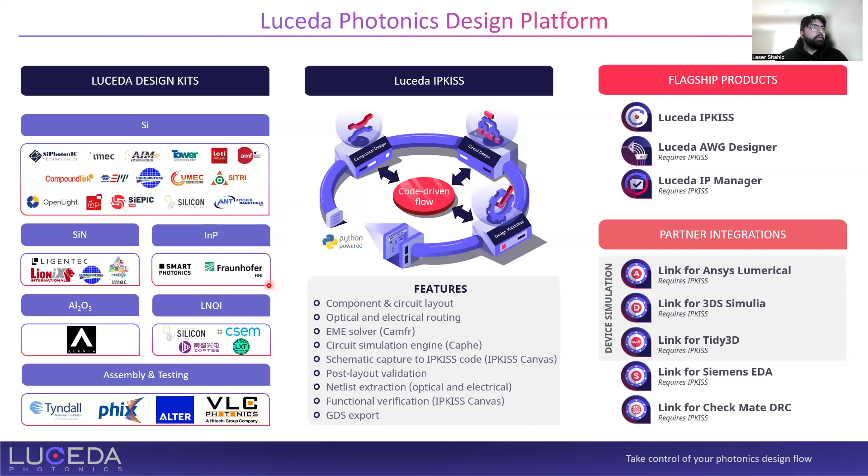So Luceda IPKISS has many different features and helps you to facilitate different stages of the design process. So the first thing we'll talk about is component design. Again, we're using a standard language, Python, and the way that we're able to do component design with Python code is that it's parametric. So the components and the layout and the simulation are all able to be parametric.

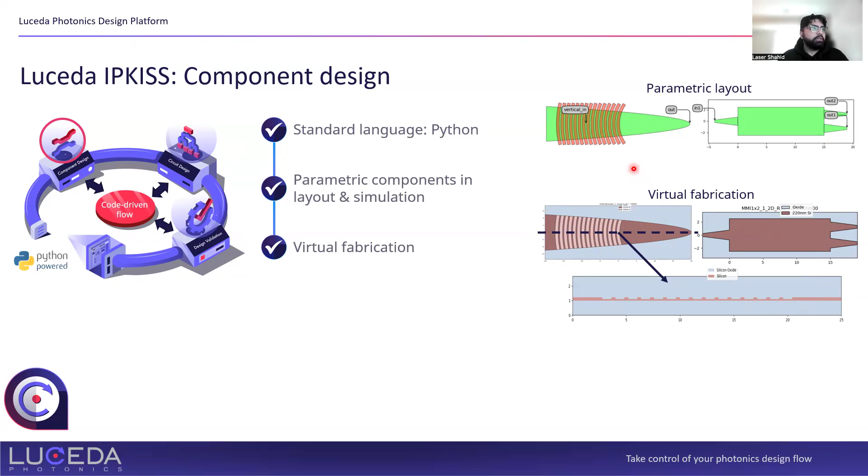There's a virtual fabrication feature where you're able to see what the device would look like when it's fabricated using the PDK. There's a built-in physical EME simulator, so you're able to run EME simulations with IPKISS, and then of course, as I mentioned earlier, you're able to do simulations with third-party tools such as Lumerical, Tidy3D, so on and so forth.

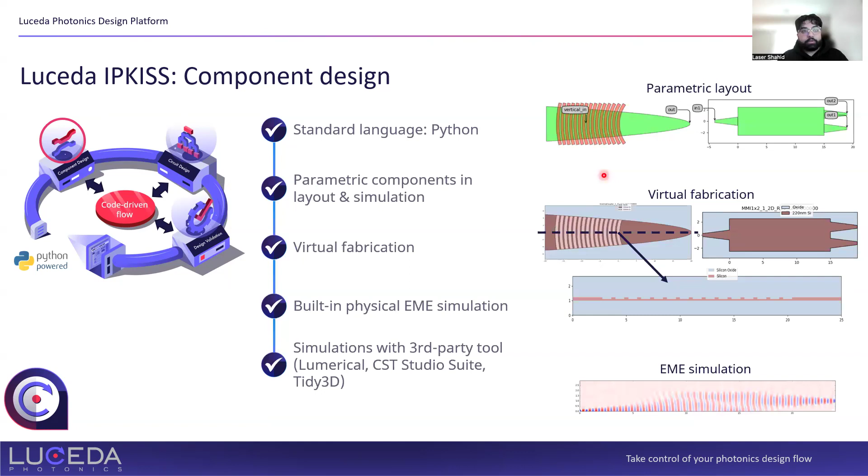So circuit design is also parametric, and it is a code-driven circuit design. And we have a bunch of different features and tools built in to make circuit design easy for you. So of course there's optical and electrical routing, there's obstacle avoidance, and then there's automatic electrical via insertion. There's many different ways that you can route, and I'll show you that in our code demo later on.

When you program your circuit or your PCell or whatever in IPKISS parametrically, you can really just reuse that same code to then generate a new splitter tree, and the simulation scales accordingly as well, right? So you're not having to rewrite the circuit simulation. The circuit simulation is linked to your layout, and it scales accordingly with your circuit.

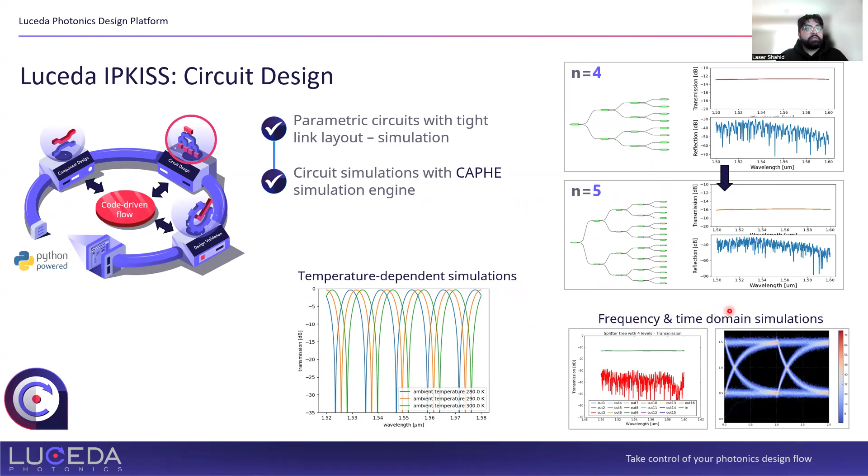Circuit simulations are done with Caphe, which is the simulation engine within IPKISS, and we also offer temperature-dependent simulations and frequency and time domain simulations, and you can even plot eye diagrams.

Another part of circuit design is IPKISS Canvas, and so this is essentially schematic capture with code assistance. So what this means is that you have a schematic interface where, let's say, you wanted to put together a very simple splitter tree.

You drag and drop your components in here, you make your connections, and then you can generate code from this to put into your IPKISS code environment. And then you're able to clean that up, make that code better, and really kind of kickstart your project. IPKISS Canvas is a good way to kickstart your project.

It's also a good way to communicate ideas around the design process. Personally, in the past I've communicated ideas with PowerPoint or drawings on a napkin. And sometimes you can get your ideas across. Sometimes it can get a little lost, but with Canvas, you can very clearly see, okay, this is how everything is connected. This is what we are intending to do. And then once you have your schematic finalized, you can generate code and get to work on cleaning it up.

Validation in IPKISS can be done through Canvas as well. Canvas uses netlist extraction, so this gives you an accurate representation of whether components are connected or not. So if there's a missing connection in your code, it's going to be reflected in your schematic in Canvas. And if there's something that's misconnected, that's also going to be reflected. This works for both optical and electrical connectivity.

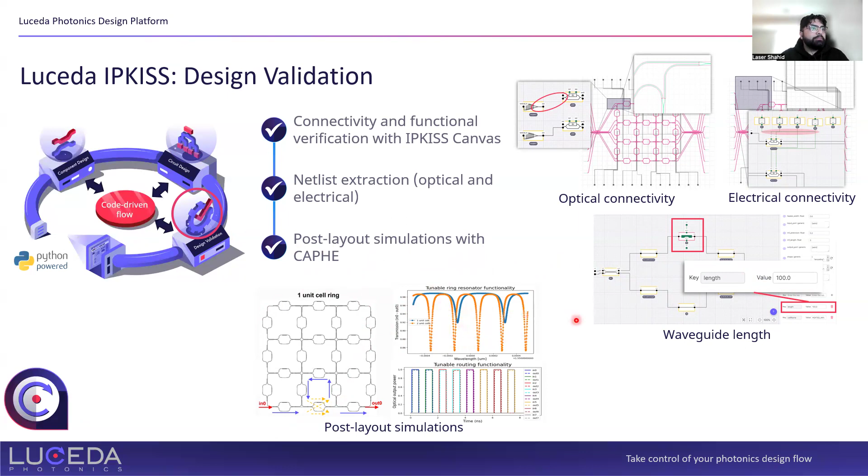You can also run post-layout simulations using Caphe. This is part of the design validation. So here, we have our circuit, and we're running a simulation just to verify that the circuit is behaving how we want it to behave. And then there's also 3D export, so you can export your design as a 3D visualization file.

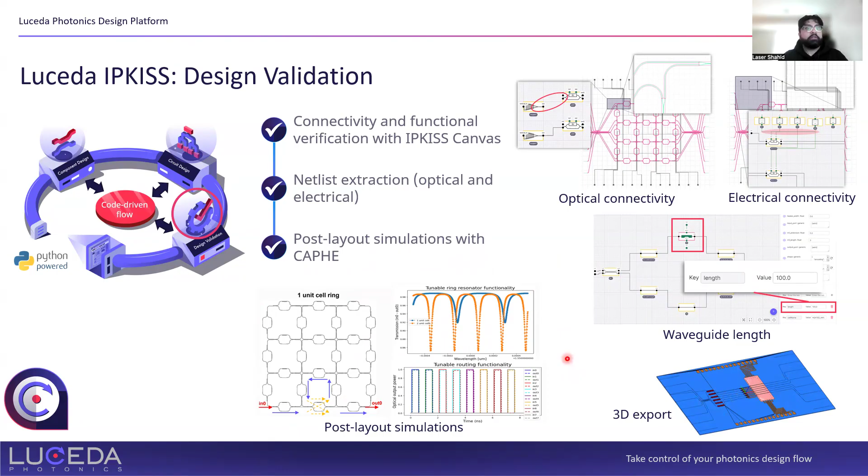And then for tape-out preparation, there's a few extra tools that we offer. One thing we offer is detection of overlapping layers. So if you have two waveguides that cross each other, you can search for overlapping layers and it'll tell you where they are, and then you can go and fix those overlapping layers.

Sometimes with a large layout, it can be very difficult to see, especially when you're working with a PDK that has many, many layers, and you're having to look through all the layers in your GDS file. It can be difficult to detect those. So IPKISS offers overlap detection, which tells you where things are overlapping.

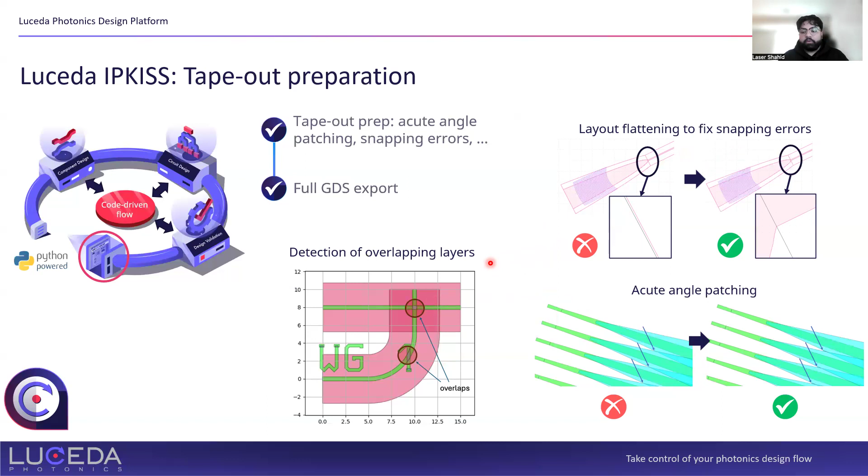Layout flattening is also available to fix snapping errors. And then there's also acute angle patching that is available for tape-out preparation. And of course, there's a full GDS export. So right from IPKISS code, you can export fully to GDS and have that ready for DRC or tape-out or whatever you need.

And the Luceda design kits all leverage the same standard language, Python. These design kits include the component layouts, the component simulation models, and also models of the components as well. These also work with IPKISS Canvas for schematic capture and verification. And you can also export to OpenAccess and uPDK standards.

One thing that I also want to touch upon is that Luceda offers fantastic training and support. What this means is onboarding training, training material and documentation, Luceda Academy, customer support portal, application support, and a bunch of different training events as well. Onboarding training means that once you get a license, you'll either meet with me or somebody else from Luceda, and we'll help you get started with a project in IPKISS; we're really there to teach you how to use the software. There's also plenty of training material and documentation available online.

Luceda Academy is a Python project that comes shipped with every copy of Luceda IPKISS, and it contains a ton of code examples, which teach you everything from component placement to routing to setting up a simulation, to setting up a link to Lumerical simulation, even specific examples if you're looking to work on an OPA or a PPC or something. Those examples are available so you can take a look at how that's done in IPKISS and adapt that code for yourself.

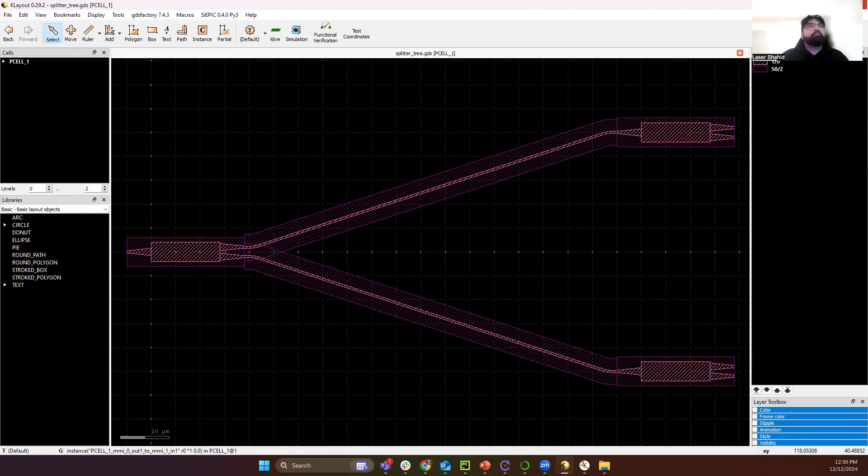And let me actually go ahead and open up the GDS file for this guy as well. So splittertree.gds. Here we go. Here's the splitter tree that we just made in IPKISS. This is just a very simple example of how to put a circuit together.

Next I'll show you a much more generalized example of how we can make a splitter tree, right? This is a fully parametric splitter tree. In our case now we have variables that we define for our class. We have a splitter variable, number of levels, X and Y spacing, and then we have property restrictions here.

This just basically is saying that these variables can only be restricted to certain things. So splitter can only be a PCell, number of levels can only be a positive integer, and then X and Y spacing can only be positive numbers. Then we're defining our splitter here. So by default, the class is going to call a 1x2 MMI at 1550.

And then we're using a nested for loop to go ahead and generate all of the splitters that we need for each level of our splitter tree. So, you can very easily also just hard code everything like this, but using the power of Python, it takes you maybe like a minute or so to write this, and now you're able to generate all the splitters you need for your splitter tree.

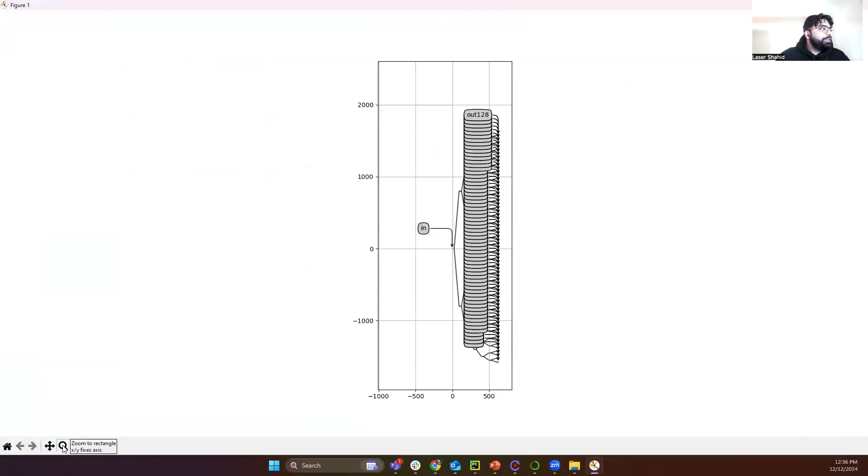So when I run this, it'll go ahead and generate the layout for us to look at. And it's definitely pretty crazy, but if we zoom in, we can see all of the splitters that we've generated and all the levels for it.

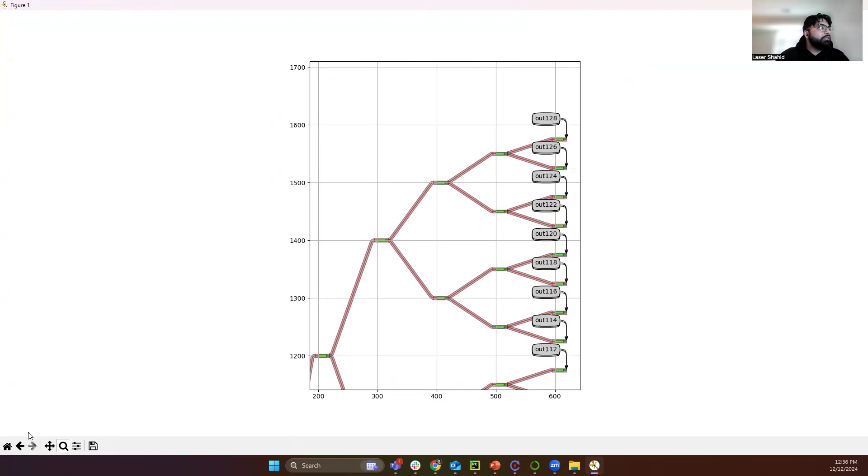And now let's say you want to change up the splitter, right? So right now, the default splitter that we're using is our 1550 1x2 MMI, but let's say you want to use a Y splitter, right? So we can go ahead and say splitter equal to PDK dot, see here, Y branch. And now we'll do splitter equal to splitter. And this will now generate a 4-level splitter tree using a Y branch.

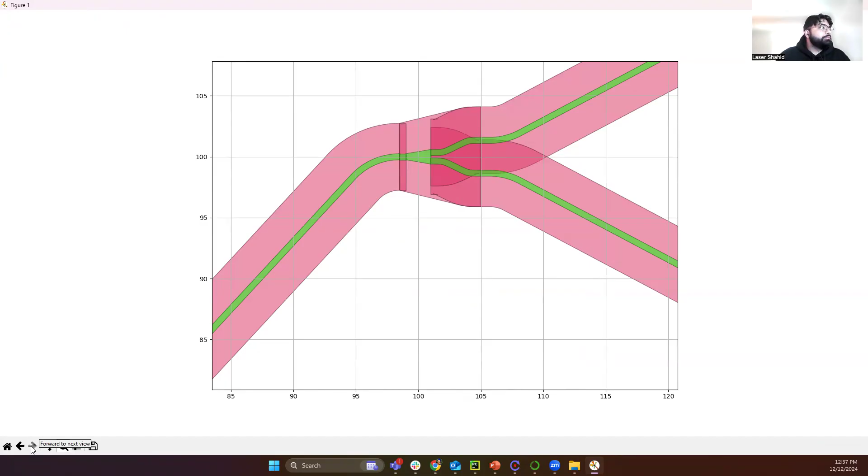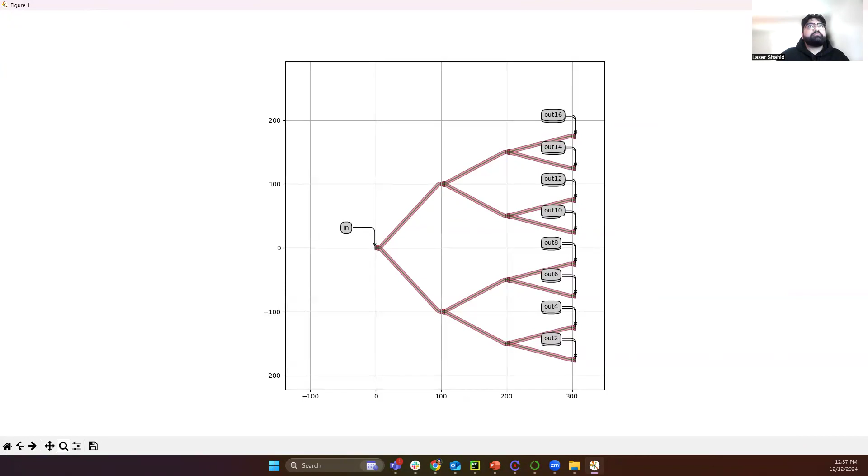So if we go ahead and we zoom in, we can see that we're now using Y branches to connect, just to do all the splitting for us. So, this is what I mean when I say, you write once, reuse it as many times as you want. In this case here, we wrote the code once, and now we can make a completely different type of splitter using a Y branch as opposed to a 1x2 MMI.

We can change the number of levels that we want for our splitter as well. And as I've shown in here, it's all pretty automatic, right? The way that we kind of set this code up, it's reusable and reconfigurable. And so, especially when you have multiple people on a project or you need to reuse resources, having code that you can reuse and reconfigure saves a lot of time.

One thing I also want to show you as well is just some additional things we can do for laying out and connecting our splitter tree. So now we're preparing this for a chip, right? So we call our splitter tree. Now we have grating couplers that we want to use to connect to our splitter tree, and then we have a waveguide crossing that we're going to use as well. We have our number of levels, X and Y spacing, and then the grating spacing.

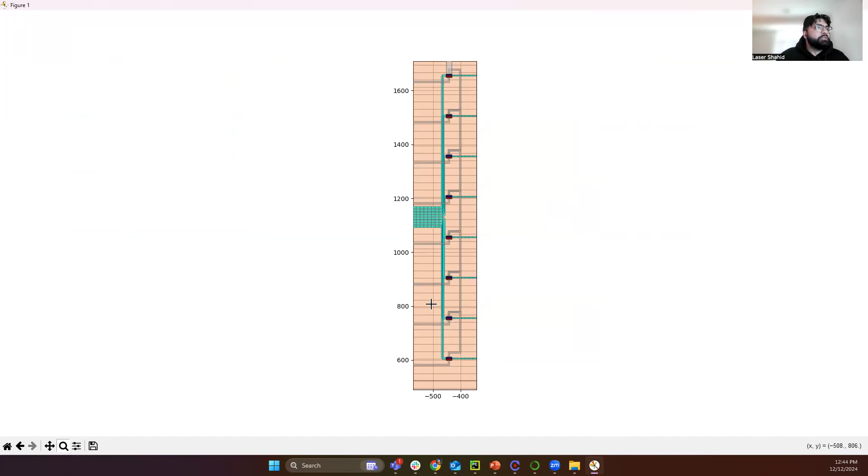We have a simple splitter tree here that is then being routed to our thermo-optic phase shifters. And then those are all being routed to the output grating couplers. And then we have some test grating couplers here, some test electrical lines here. And then we have all of our electrical routing for our thermo-optic phase shifters going to our electrical pads.

And here we're using an electrical via as an example to show it going between two different layers. But using the Phix ADK, we're able to then have a kind of blueprint, so our chip can be laid out such that it's ready for packaging with Phix.

So, that was a pretty comprehensive overview on making layouts in IPKISS. I think one thing that is definitely important as well is making your components in IPKISS. So making your components or your PCells is very similar to making a circuit. You have a class, you have your parameters. The only exception is that now we're inheriting the PCell class. So basically what it's saying is that everything in here should be treated as a PCell.

So again, we have our properties. We're now defining a default trace template. Trace template is essentially, the best way I can describe it, like a cross section of a waveguide. It defines how waveguides are connected. Then we have a validation function just to make sure that the properties that we're passing in aren't going to generate a super weird and crazy MMI.

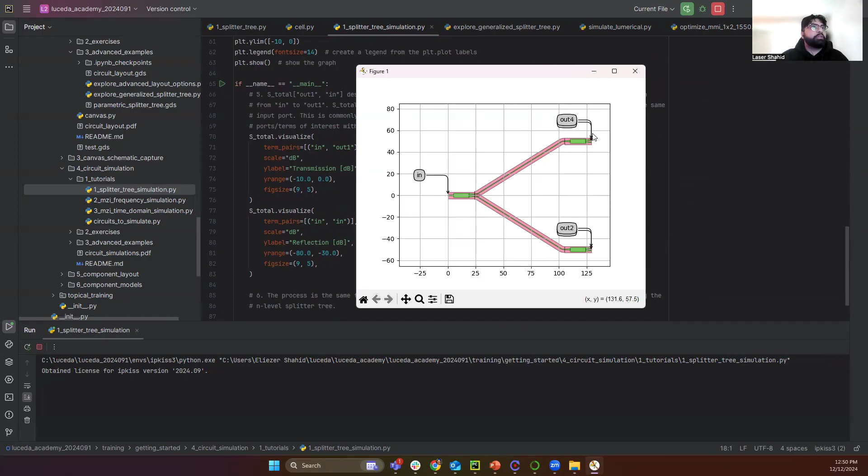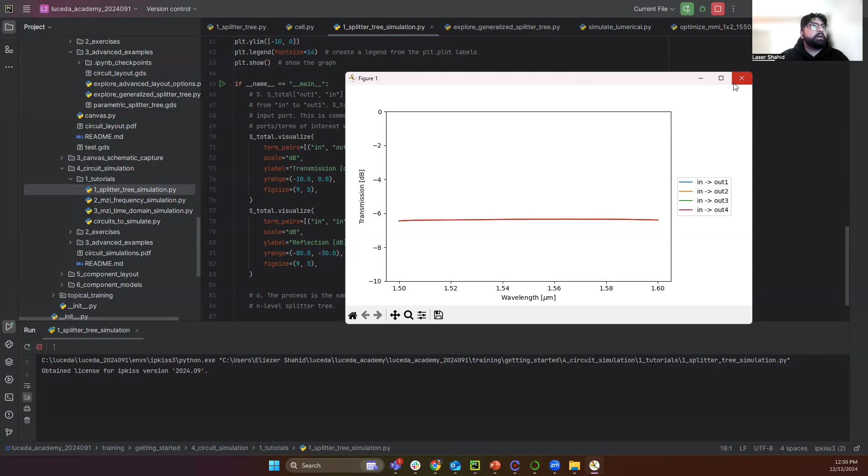And so what I'll go ahead and do is run this. And what it'll do is give us an overview of the circuit, telling you, hey, this is the circuit we're simulating today. And then it'll go ahead and show us the transmission of our circuit. And it'll also show us this guy. This is the other transmission. And then reflection of our circuit. And now we have our circuit simulated here.

IPKISS also does time domain simulations. So very quickly, I'll demonstrate that. I know we're running out of time, but I'll demonstrate this very quickly. Here we're defining our ramp function for linear voltage. Then we specify our optical source and our voltage drive. And here we're making a very simple test bench circuit.

We call our MZI here. And then we set up our circuit here. We have our device, optical source, voltage drive, and then the probe. And then we have our link, all the connections we want to make. And then we call the time response for our circuit, and then we plot it. So when I run this, it should go ahead and show us our circuit that we're going to simulate. And then it will also

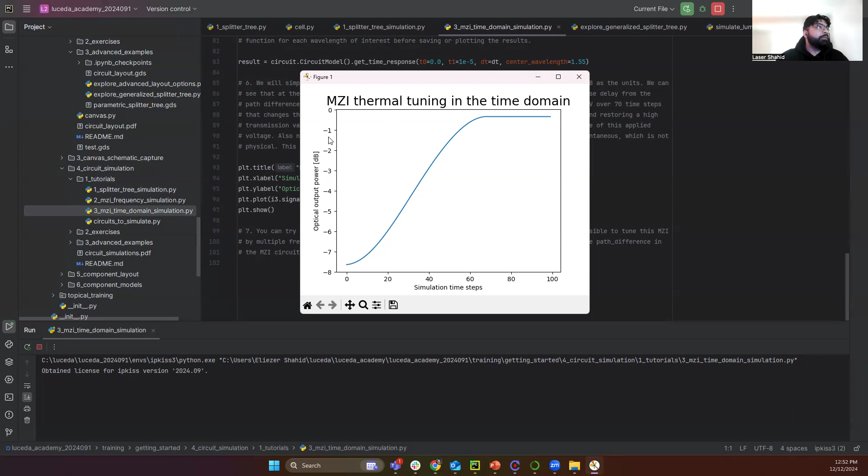run the simulation for us. And now we can see the response of our MZI when we're doing thermal tuning in the time domain. So we have our optical output power versus the simulation time. So there's these kind of built-in simulation options. But now I want to quickly go over the link to Lumerical. So,

the link to Lumerical: in this function right here we're making a very simple function where we're going to simulate our splitter with Lumerical. So it's going to take a layout, project folder, data tag, wavelength range, and the simulation gaps. And the nice thing about this link is that when you're writing the simulation, you're not writing Lumerical code, right? You're basically calling different functions and then passing in the relevant parameters and the relevant information for it.

So, in this case, to define our simulation geometry, we're passing our layout, and then we're passing in our bounding box here. And then here we're now making our simulation. So we're doing an EME simulation. And we pass in our simulation geometry, which we defined earlier. And then we pass in our monitors. We pass in the output that we want, which is an S matrix over a specified wavelength range.

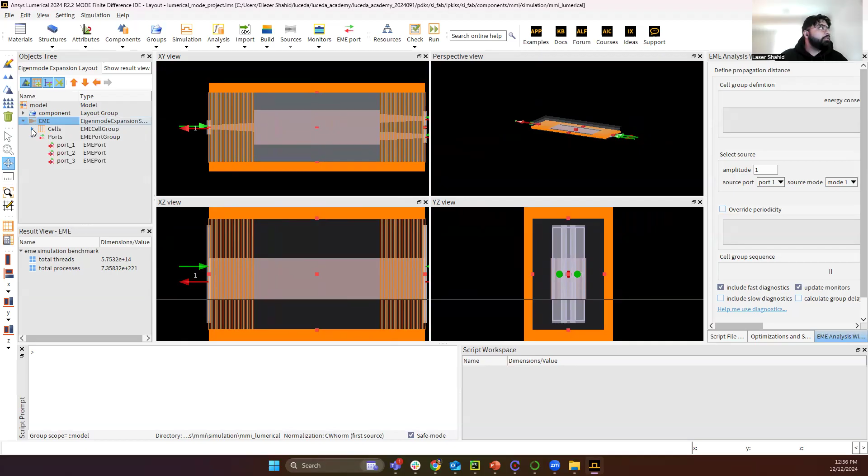Check it out, ports, cells. You can check out the port information. You have your layers for your components. Everything's in there for you to kind of play around with and check. You can inspect the simulation once it looks good. You kind of close out of it, and then it'll go ahead and run your simulation and then display the information at the bottom here.

But yeah, so this is super helpful for a design flow because it's like, what you need for your project, right? You need a 1310 MMI or 1550 MMI. You write the MMI in IPKISS, and then you say, okay, MMI is written. Now I need to go ahead and optimize this.

You write a simulation function, very simple, right? You're not doing anything crazy here. You're just passing information into functions that already exist. And then you run it, and then you get your transmission and reflection. Then you can take that data and do whatever you need to do with it at that point. There's also, obviously, then you can optimize your component as well.